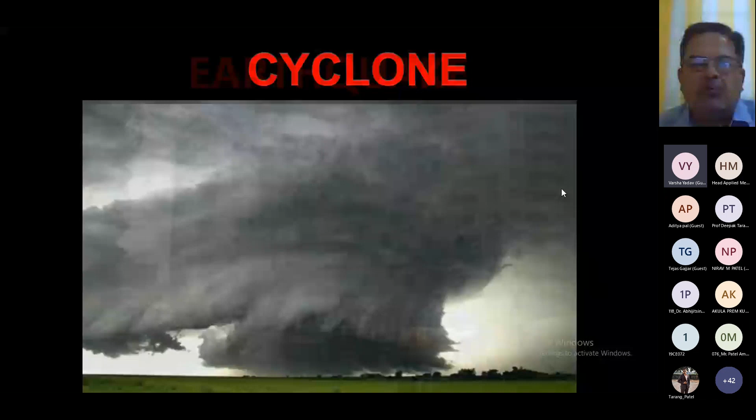Cyclone, we have flood, we talk about fire, landslide, we talk about liquefaction, we talk about tsunami and many other disasters, right? But these are the disasters which are important from the structural engineering point of view, so these disasters are included here.

And when we talk about these disasters, either we categorize them into natural disaster or man-made disaster. Most of the time, we say earthquake disaster is a natural disaster, cyclone we say it's a natural disaster. Flood, when it comes to flood, we say it is both ways, it is a natural disaster as well as a man-made disaster, because sometimes because of the mistake of human beings, the area is flooded.

For example, what happened in Surat was the classical case of man-made flood. Same way, Machu Dam collapsed way back in 1979, and that was because of human error, so you can say it's a man-made disaster. So flood may be man-made, it may be natural.

Same way, fire is also natural and man-made. Landslide again is natural and man-made. For example, if landslide triggers because of earthquake, that is natural, but once you carry out mining operations in a hilly region, and if landslide triggers because of the explosion you are doing in the hilly region, then it is a man-made landslide. Same way, you have liquefaction and tsunami.

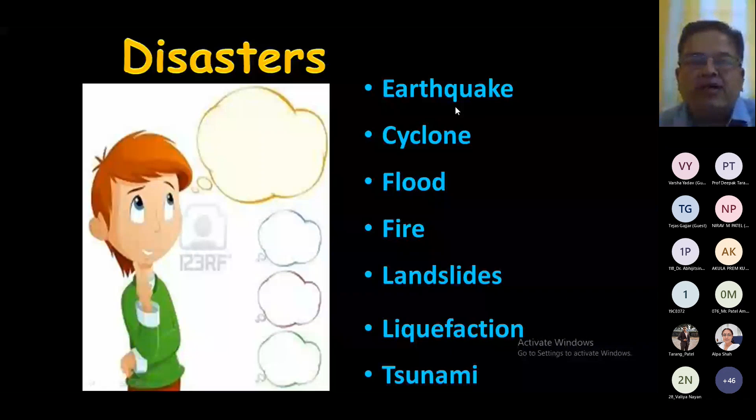Therefore, earthquake is a man-made disaster, and the solution lies in the building, not in the earthquake. You have to make your building safe. You have to consider all types of earthquakes when you design your buildings, but your building should remain safe during the earthquake. That is the most important challenge we have. So you have to focus on building safety, and construct buildings in such a way that they remain safe during earthquake or any disaster. So again, earthquake does not kill, unsafe buildings do, and therefore earthquake is considered a man-made disaster.

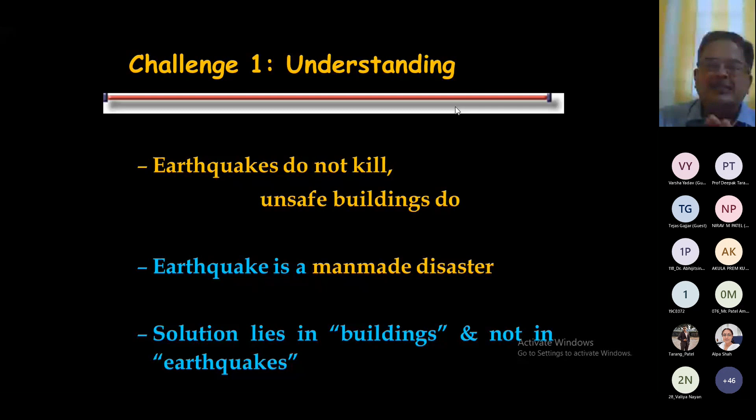Earthquake is a natural hazard, but the disaster is man-made. If you look at any particular disaster, you find two things involved: loss of life, which is fatalities. If 100 people die during disasters, 47 of them die in earthquakes, so the highest contribution is from earthquake. Similarly, if we lose 100 rupees in economic loss, 35 rupees of that is the contribution of earthquake. So the highest economic loss is also associated with earthquake.

So you have to be very cautious when dealing with earthquakes and structures. Design of buildings for earthquake is a very challenging job.

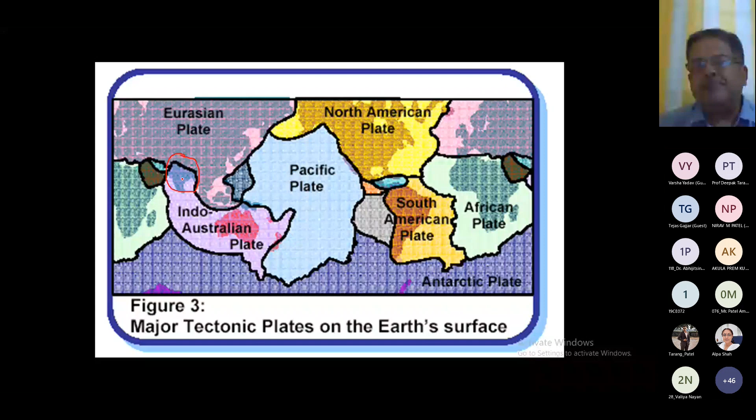So we go to the scenario of Indian earthquakes. We know there are 7 major tectonic plates: Eurasian, Indo-Australian, Pacific, North American, South American, African, and Antarctic plate. India is located on the boundary of two plates, the Eurasian plate and the Indo-Australian plate, and the Indo-Australian plate is going below the Eurasian plate.

We know that on the northern boundary, right now we observe the Himalaya there, but 10 crore years back there was a sea, and this sea was disappearing.

This Indo-Australian plate is moving below the Eurasian plate, so they are creating pressure on each other. When the stresses within the plate exceed the limit, the plate will break, and therefore the majority of earthquakes occur on this boundary of the two plates. If an earthquake takes place on the boundary, it is known as an interplate earthquake, and the earthquake which takes place within the plate is known as an intraplate earthquake.

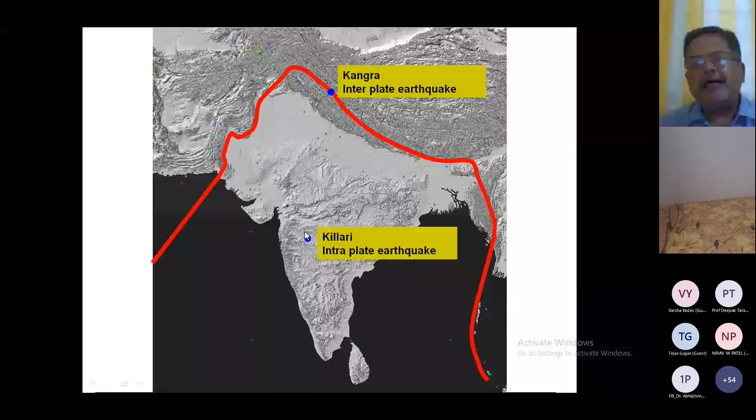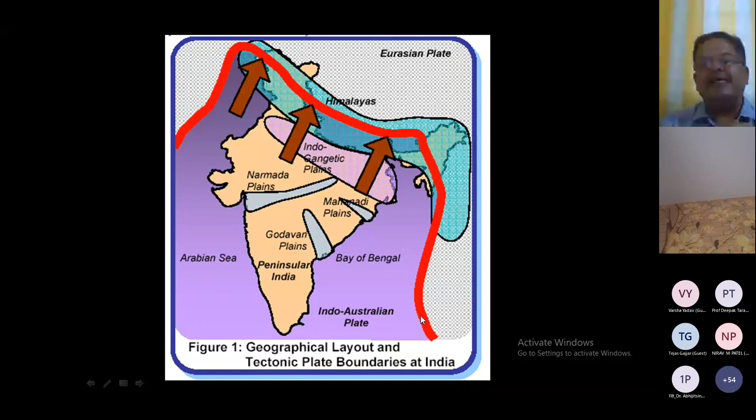Now if you look at this, we have seen this picture. This is the boundary of the Indo-Australian plate and the Eurasian plate, where these two plates are interacting. The Indo-Australian plate is going below the Eurasian plate, and you can see that more than 95%, actually 98%, of earthquakes are coming on this boundary where these two plates are interacting.

So when we are locating earthquakes, or the epicenter of earthquakes, on a map, it is known as an epicentral map. This map will tell you that most of the earthquakes are coming on the boundary of the two plates, and within the plate few earthquakes are there. So almost 98% of earthquakes are on the boundary, and maybe 2% of earthquakes are within the boundary of the two plates.

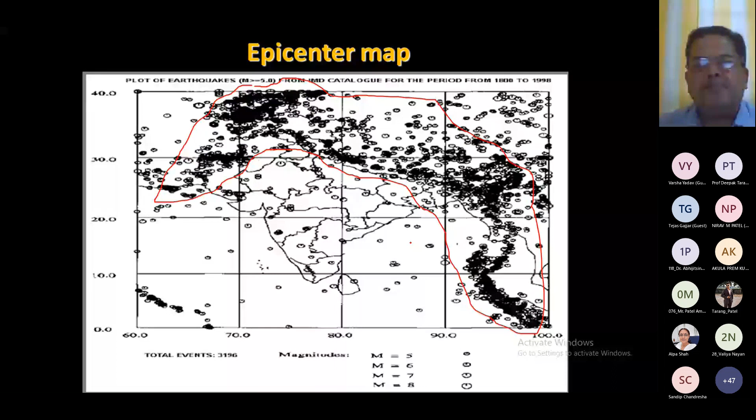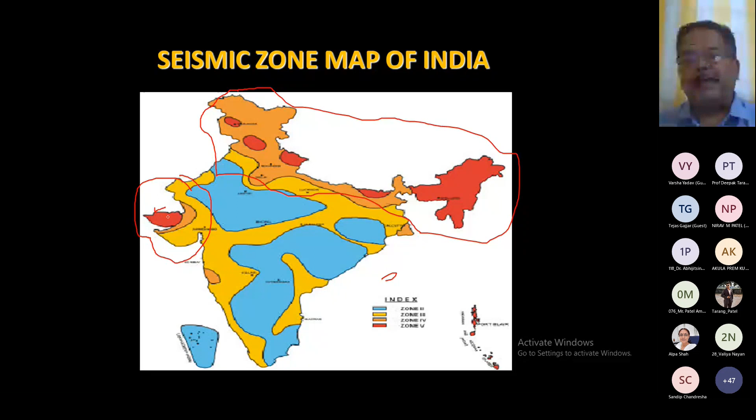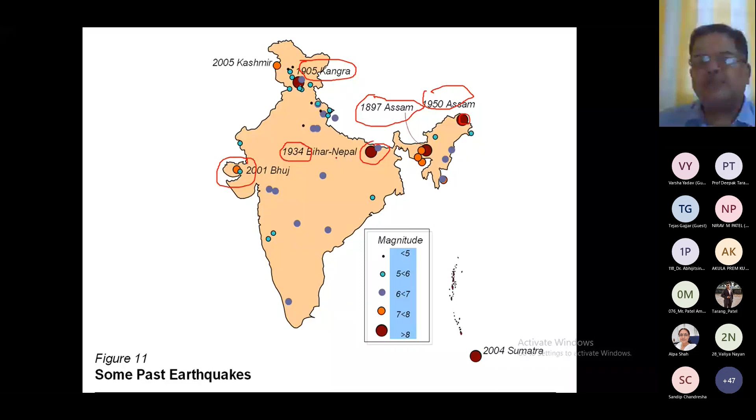And you see, this is the epicenter where the Bhuj earthquake took place. This is the place where the Bhuj earthquake took place.

Now, if you look at some past Indian earthquakes, and if you look at this particular list, you find that the Kutch earthquake of 1819 had a magnitude of 8.3, and the number of deaths observed was 1500. In 1819 it was thinly populated, and even though 1500 deaths had been observed - if you look at the Assam earthquake of 1897, it is 8.7 and 1500 deaths again observed.

If you look at the Coimbatore earthquake, magnitude 6, but the most important thing is this number - no death had been observed during the Coimbatore earthquake. Now, Coimbatore is in the south. It is an intraplate earthquake, and the magnitude was less, and the time of shaking was also very less.

The Kangra earthquake of 1905, magnitude 8.6, 19,000 deaths had been observed. Just imagine, in 1905, Kangra is in Himachal Pradesh, and if such a big number of casualties happened during that time, it exhibits the severity of that particular earthquake.

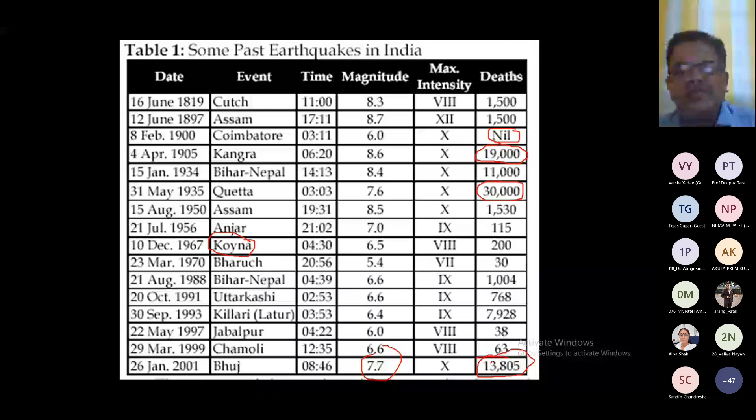Numbers of deaths should be nil. Again, I'm saying we always assume that our structures are safe. We design our structures in such a way that they should remain safe during all disasters, and therefore this number should appear nil as far as the column of death is concerned. But you can see 14,000 deaths within a few seconds, which is something amazing.

So if we talk about some great Indian earthquakes, I told you that India has a probability of having big earthquakes whose magnitude is 8.3, meaning more than 8. It is considered to be a great earthquake. So India has observed 5 great earthquakes in the past: 1819 Kutch earthquake, 1897 Assam, 1905 Kangra, 1934 Bihar-Nepal, and 1950 Assam.

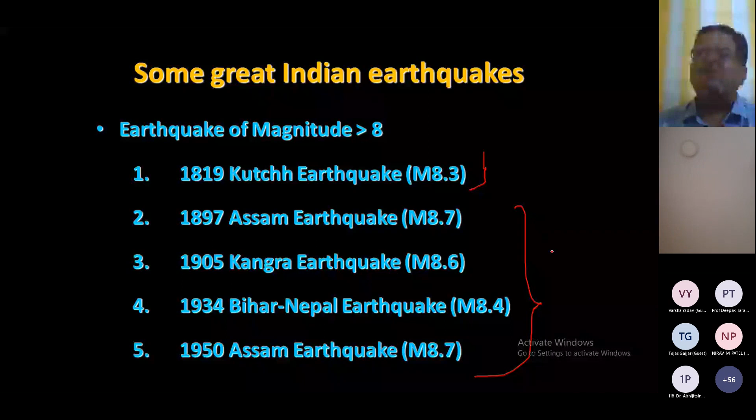Out of these, if you look at this, these 4 earthquakes are interplate earthquakes, and this one is only an intraplate earthquake. I'm talking about earthquakes which took place on the north or northeast boundary. So if I'm talking about the interplate earthquakes, you will find 4 earthquakes.

From 1897 to 1950, how many years is that? 53 years. India has observed 4 great earthquakes. What is the return period? The return period is 13 years. So we can conclude that India has a probability of having big earthquakes at an interval of 13 years. The whole earthquake engineering is based on probability.

You can see in the last 72 years, from 1950 to 2022, no great earthquake took place on the boundary of these 2 plates. But if India has a probability of having big earthquakes at a regular interval of 13 years in the past, as we observe, then I can say that after 13 years we have a probability of a big earthquake. If it doesn't come, then after 20 years the probability will increase.

Now you can see 72 years have already gone past, and we don't have a great earthquake on the boundary of these 2 plates. And therefore there is a theory of seismic gaps. If you look at the theory of seismic gap...

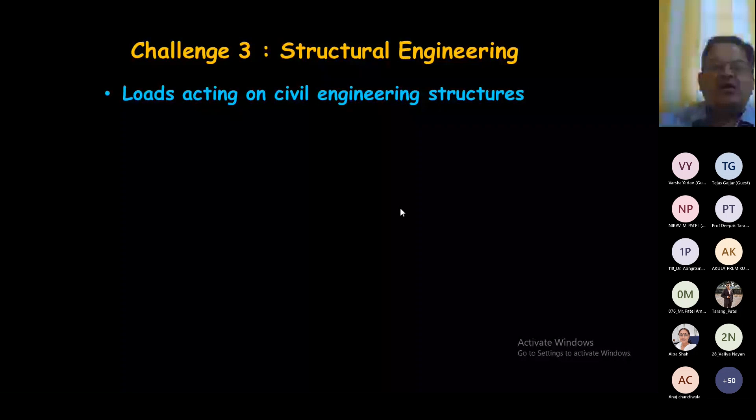When we talk about our structures, we are generally designing them for the loads acting on them. There are two types of loads: gravity loads, which act in the direction of gravity - dead load and live load - and some loads which act in the lateral direction. There are many types of loads acting on a structure, but I'm talking about the basic loads of concern for which we design our structures, the dead load and live load, which are known as gravity loads.

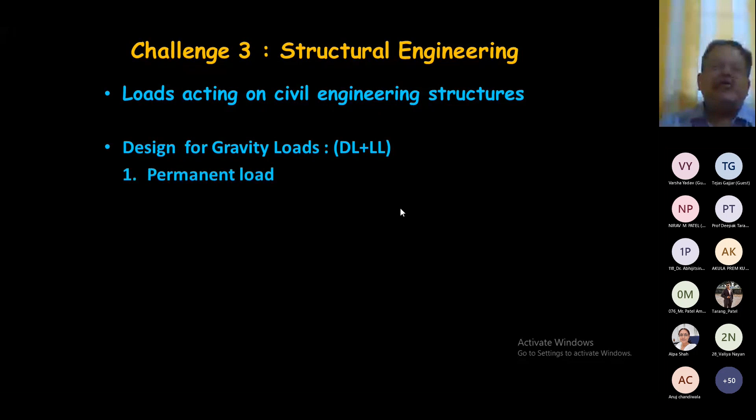Generally this load is acting on your structure, so we consider it a permanent load. And we know that if I'm designing my column for 100 kilonewton, then I apply a factor of safety of 1.5 load factor, and design that column for 150 kilonewton. So actual load coming on that column is 100, but we are designing for 150.

It means your structural element is not going to get damaged under any circumstances. So they are designed for a no-damage condition. This is very important. When you're designing your structure for gravity loads, it is designed for no-damage condition. So this philosophy of designing elements for gravity loads does not allow any sort of damage because the factor of safety is involved.

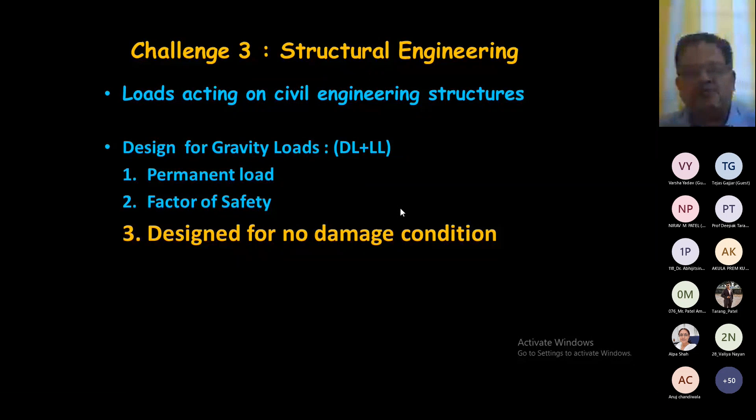When I'm talking about lateral loads, definitely wind and earthquake come to mind. Wind is quite frequent, and when we design our building for wind force, we apply a factor of safety, and we are not allowing damage during the wind force. During the cyclone, we are not expecting damage because we are designing our structure with a factor of safety. But when it comes to earthquake, how we design is important.

Now, if you look at the earthquake event, the philosophy for earthquake design is something different as compared to the design philosophy for gravity load. So we have to understand earthquake first. Actually, what happens in an earthquake? The rock fractures, and because of the sudden fracture of the rock, energy is released, and this energy travels in the form of waves which shake the foundation of the building.

So some of this energy enters into the building, and your building has to absorb this energy. If your building is able to absorb this energy, it remains safe. And if your building is not able to absorb the energy, it will collapse.

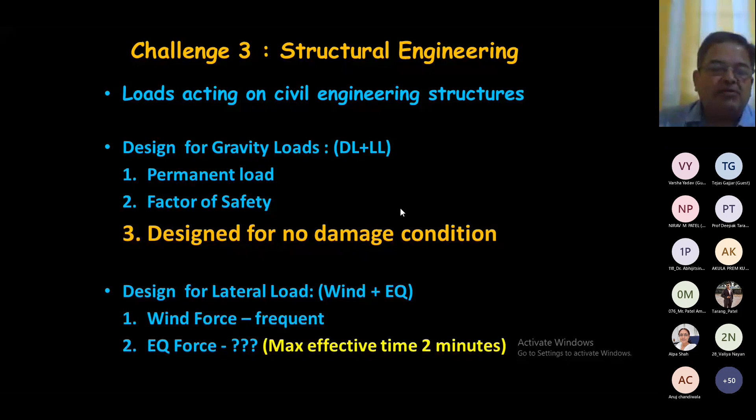So when I'm talking about earthquake, I'm not sure whether my building will absorb the earthquake or not. We'll see that part. That's why I had taken this example: compare two structures constructed in the Kutch region of Gujarat.

Generally, buildings are designed for 50 years. Right now in Gujarat, construction of tall structures is allowed, and as per the code, most tall structures whose height is more than 100 meters are designed only for 50 years. Here I am considering 100 years - double what is mentioned in the code. I'm considering the life of the structure to be 100 years.

Now I'm considering the first structure, which was constructed in 1818. If I consider the life of the structure is 100 years, it means for these 100 years your structure should remain functional, and the stresses must be within limit. Then you can say that your structure is fulfilling the requirement - it should remain functional and the stresses must remain within limit. That is the requirement for a structure to be usable.

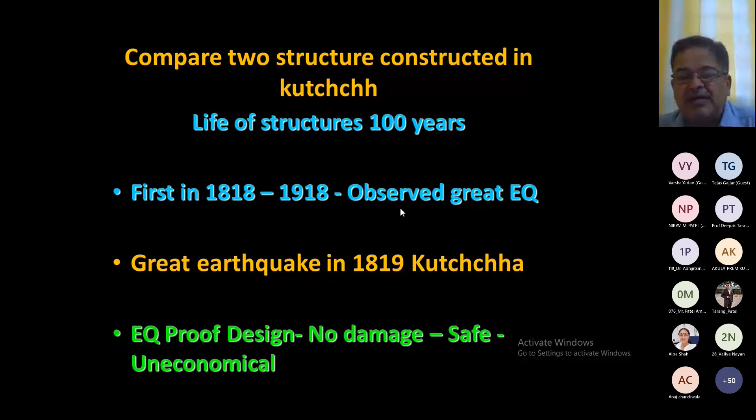It is uneconomical, right? Now I'm considering the second structure, which is constructed in 1820. Second building, 1820. Now this building will expire in 1920. So if you look at the history of earthquakes in Kutch region, we had a great earthquake in 1819, and then a major earthquake in 1956 in Anjar. Now if I'm talking about this building from 1820 to 1920, this building has not observed any earthquake.

Now this is the other part. One building has seen an earthquake after its construction. The other building has not seen any earthquake during its life. So therefore we are saying the earthquake is not a sure event. Whether your building will see an earthquake during its life or not, it is not sure. And if we learn something from this second building, constructed in 1820, then this building is saying that there is no need to design for earthquake.

Now you see, I told you that whole earthquake engineering is based on probability. And suppose the earthquake came not in 1819 but in 1850, then it might have observed collapse. So the building becomes unsafe. And for unsafe buildings, there is no space in the field of construction. So we cannot design unsafe buildings.

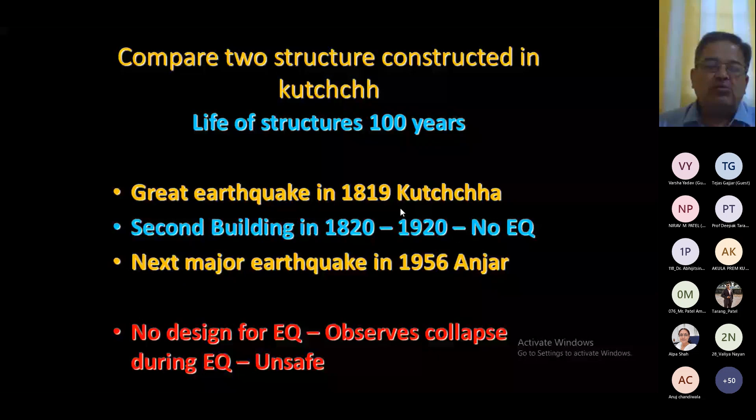So the first building is saying that you design the building as earthquake proof, and this building is saying that there is no need to design the building. So two extremities. And therefore what we can conclude is that the earthquake event is not a sure event, and therefore we are going for another approach, which is known as earthquake resistant design. Now what is earthquake resistant design? That I'll tell you.

Now in this earthquake resistant design, we are allowing the damage, but we are not allowing collapse. So when I'm allowing damage in my structure, but not allowing any sort of collapse, then it is safe, because your building is not going to collapse during the earthquake. And at the same time, it is also economical, because I am designing my building for a lower level of force. So instead of going for earthquake proof design or no design concept, we are going for earthquake resistant design concept, and this is the only philosophy in which damage is expected.

Now I will make you understand what exactly we are doing in earthquake proof design. So here, look, this is point D. This is the maximum force coming on your structure. And when I'm designing my structure for this maximum force, this is the force versus deformation curve.

Now it remains linear. Linear means it remains elastic. So when I'm designing for the maximum force, and during this my structure remains elastic, then it is not going to observe any damage, because the structure will deform and then come back to its original position without any damage. So your building is safe. But you are designing, for example, this load is 100 kilonewton. When you are designing for 100 kilonewton, your structural element will become too costly, it will become uneconomical. So it is safe, but it is uneconomical.

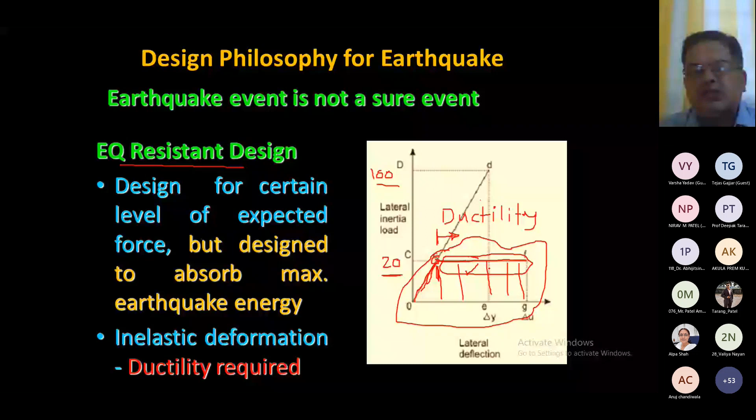So here we are allowing this inelastic deformation. This earthquake resistant design, we are allowing the damage. The damage is allowed in this particular portion, but no collapse, remember, no collapse. So it is safe, because no collapse is observed, and it is economical because instead of designing for 100, you are designing for 20. So your structural elements are very small compared to 100.

But the only risk in earthquake resistant design is if an earthquake comes, then you have to be ready for retrofitting. In case of a major earthquake, your building will absorb damage, and there is a possibility that retrofitting is needed after the earthquake.

So therefore, I'm always saying that earthquake design is not a strength-based design. We are not designing for 100% strength, we are designing for 20% strength. But the earthquake resistant design is basically based on the energy absorption concept. How much energy is absorbed by your structure?

Because earthquake releases energy, and your structure has to absorb that energy. Here we are allowing the damage. We are making our structure ductile, and when we make our structure ductile, it will absorb a lot of energy. So earthquake resistant design is always a challenge. Why? Because actual load coming on your structure is 100 kN, but you are designing for 20, and after designing for 20, you are still saying that my structure is safe.

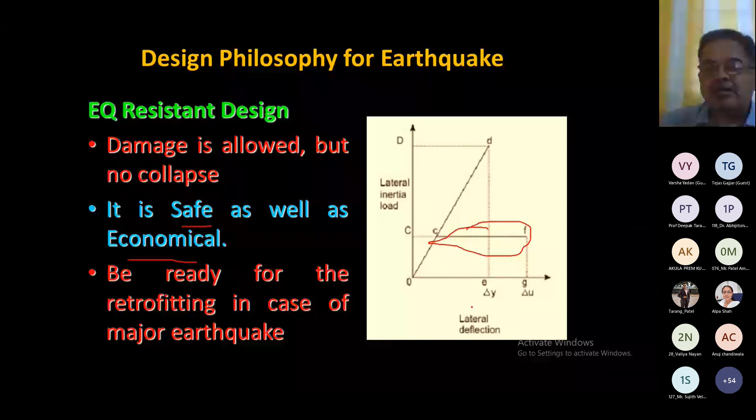So earthquake resistant design is a challenge, and as engineers, we have to contribute to make our structure safe. There are various challenges ahead which we'll discuss. Now this is very important, remember this curve.

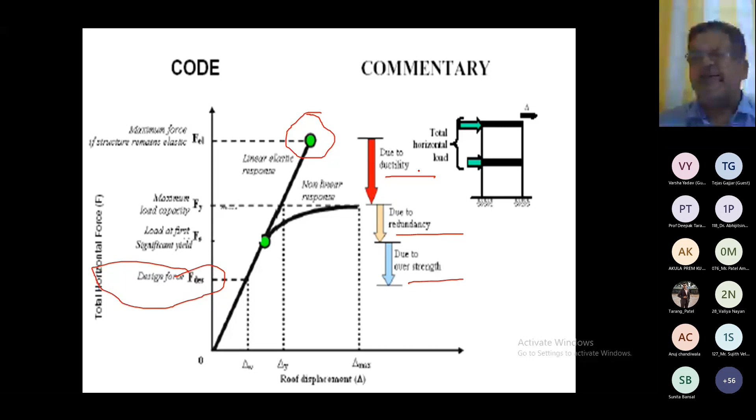This is the maximum load coming on your structure because of the earthquake, and you are designing only for this much force. So here, this is the design force, and you see how you are reducing this maximum load to the design load. This is because of ductility, redundancy and overstrength. These are the three factors on which we depend, and we reduce the load from maximum load to design load.

So we design in such a way that your structure should behave in a ductile way, and it will absorb a lot of energy. During earthquake you have to design your structure so it absorbs maximum energy, because during earthquake energy is released, and this energy enters into our building, and our building has to absorb the energy to make our structure safe. So up to a certain point your behavior is elastic, and then onwards you have inelastic behavior, that is where ductility comes into picture.

So the philosophy of earthquake resistant design - I'm not going in depth as far as this philosophy is concerned, but damage is allowed. This is the only philosophy in which damage is allowed, but collapse is not allowed. When a major earthquake comes, our structural element will absorb the damage, and after the earthquake, we have to retrofit our structural elements and make our structure functional again.

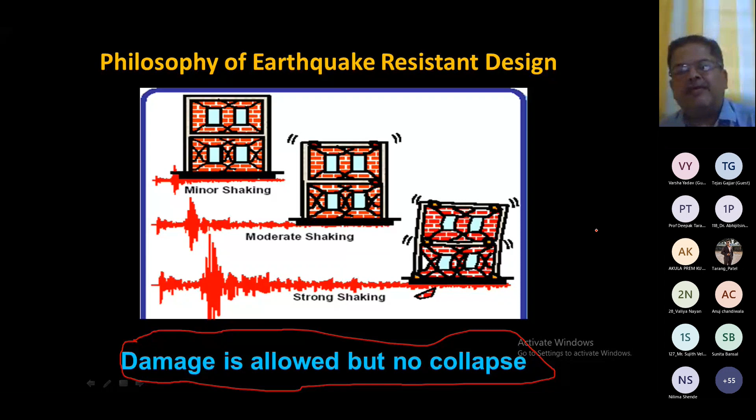Now let's compare this to earthquake proof design. Earthquake proof design means we design our structure for the maximum expected force, and your structure should remain elastic throughout the earthquake, and if it remains elastic, then there is no damage. So it is safe, but uneconomical, and ductility is not required. But you are designing for very high level of force, making your structure uneconomical, and we are not even sure whether the building is going to see that earthquake or not.

In earthquake resistant design, we design for a certain level of expected force, and we rely on inelastic deformation where damage is allowed. So when you design for 20% force, your structural element will be very small compared to the 100 kilonewton force. So it is economical, and also safe because we are not allowing any collapse. But the most important thing is ductility is required - remember, ductility is required, and IS 13920 is very important for earthquake resistant design. The only important thing is, if an earthquake comes, you have to be ready for retrofitting in case of a major earthquake.

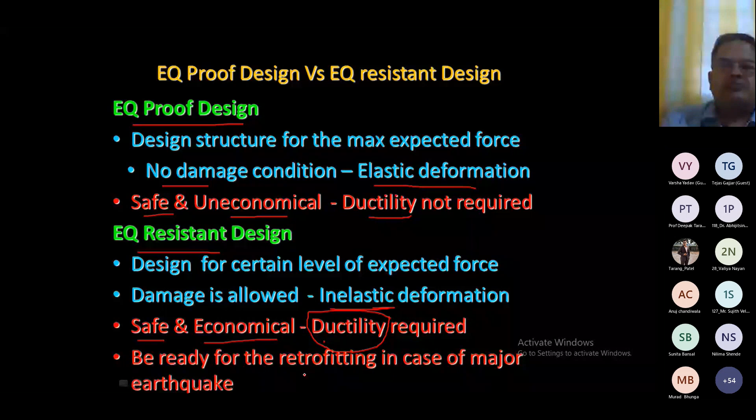Now our philosophy is saying that collapse is not allowed, right? But what is the reality? What is the fact? The fact is structures are still collapsing during earthquakes, right?

If you look at the 1994 Northridge earthquake, 1995 Kobe, or 1999 Turkey earthquake, or 2001 Bhuj earthquake, we have seen devastation during these earthquakes.

Japan is considered to be the best as far as earthquake preparedness is concerned, and even though in the 1995 Kobe earthquake, numbers of bridges failed in Japan, right? And it exposes the wrong practice of earthquake resistant design. So even though Japan is very proactive, because Japan is sitting on the ring of fire and has observed earthquakes at regular intervals, even though this is happening with Japan, then this is really alarming.

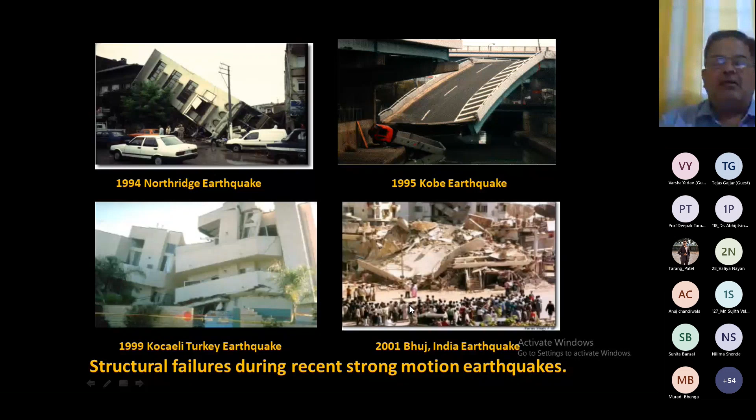If you look at America also, numbers of buildings collapsed, not like India or Turkey, but in America fewer buildings collapsed as compared to developing countries like Turkey and India. But structural failure had been observed during strong motion, right? And what is happening? I told you, the loss of life.

Now, this kind of picture we always observe during the earthquake. If you see such kind of pictures, then these pictures will disturb you as a civil engineer. You are, or we are, not ready to accept this, right? It always questions us, who is responsible for this, right?

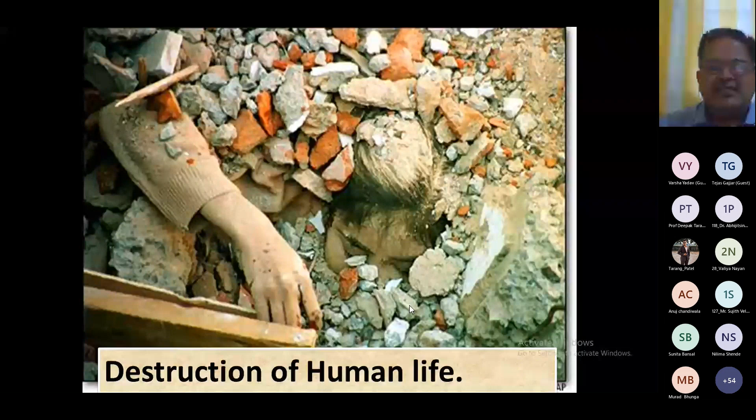This is the picture from the 2001 Bhuj earthquake. I want to share my experience of the 2001 Bhuj earthquake. I was working as an NCC officer, and we worked with the Indian Armed Forces. The Indian Armed Forces was given the responsibility of rescue and relief operation after the 2001 Bhuj earthquake.

So what they have done, they have cordoned off each and every collapse site, and they are bringing the dead bodies and valuables out of that debris, right? Our NCC cadets were working with them, and we worked for almost 6 months, and we learned a lot. Our NCC cadets have brought dead bodies out of the collapse site.

I was also involved in bringing a dead body of a 4-year-old boy, right? Now, when we are bringing it out, it always questions in your mind as a civil engineer, who is responsible for this?

I want to say that after bringing that dead body of the 4-year-old boy, I was not able to sleep for a month, I tell you. And it always questions us, who is responsible for this? As a civil engineer, we are not expecting this. If such a thing is happening, it means someone has committed a mistake. And who has committed the mistake, it is very difficult to find out.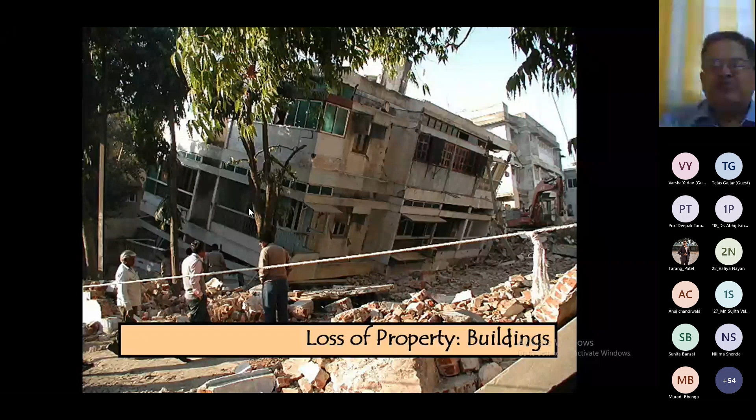Because of this, the Anjar, Bhachau, Rapar villages or towns came to debris during the 2001 Bhuj earthquake. If you look at this, the building collapsed. This is a typical soft story failure. So this is actually loss of property, and maybe loss of life is also involved in such kind of collapse.

Now just imagine, in Bhuj the earthquake took place, and this hospital building collapsed, and people were taking treatment in open spaces. Now it was winter, right? This shouldn't happen. If you look at the schools, 12,000 schools were either damaged or collapsed.

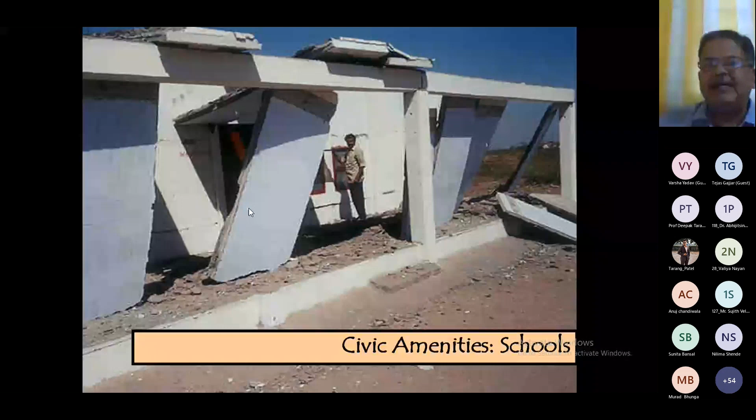The heritage buildings, they suffered a lot, and we know we are not able to restore this heritage building, because we don't have the skilled manpower. So once heritage is lost, it is lost forever because of unavailability of skilled manpower.

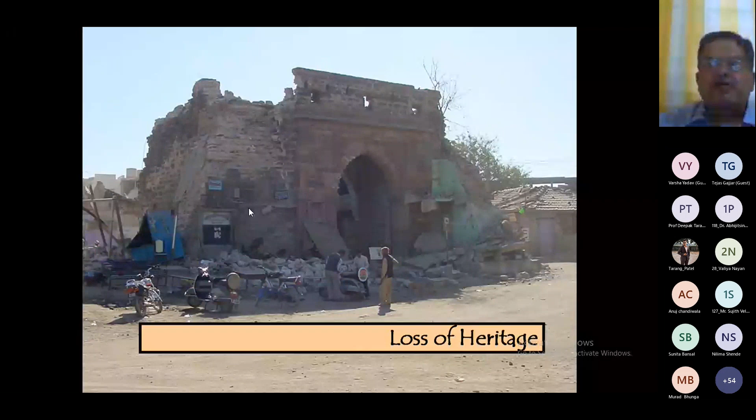This you can see is Mani Mandir in Morbi. It was damaged, and after 12 years it was partially retrofitted, and people started using it again, but not 100% - a portion is underutilized. This is the fort of Bhuj, damaged, and again, it's difficult.

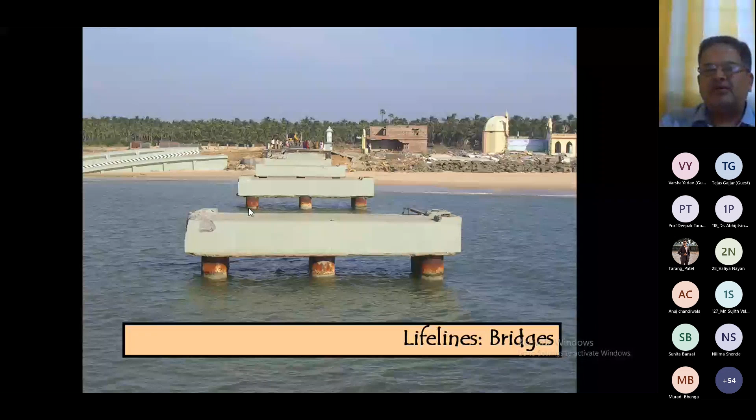Lifeline structures are affected a lot. The bridges are affected a lot, the roads network affected. So under these circumstances, we are not going to be able to carry out rescue and relief operations properly - it is affected a lot.

The electric power is affected. Harbor structures absorbed great damage during the 2001 Bhuj earthquake, and the industrial structures constructed with RC elements absorbed damage. The industrial structures constructed with steel, they are not affected because they are lightweight structures, but the RCC structures were affected a lot because they have a larger span and are very massive.

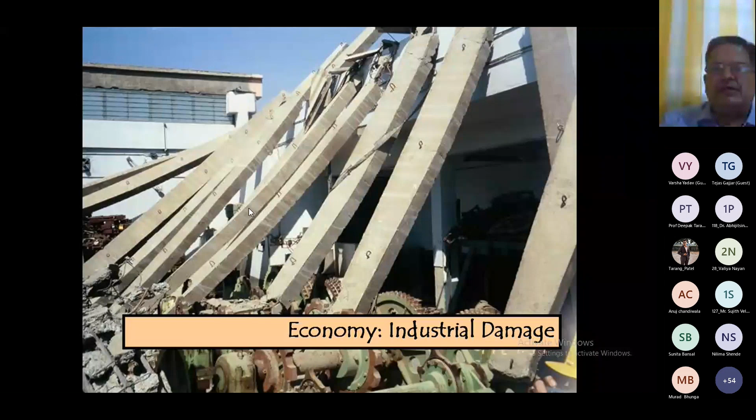And the economic loss is very difficult to estimate, right? So if you look at the 2001 Bhuj earthquake, we lost almost 25,000 crore. Now if you consider it today, it is maybe more than 4 lakh crores or 5 lakh crores. So the economic loss is very difficult to estimate.

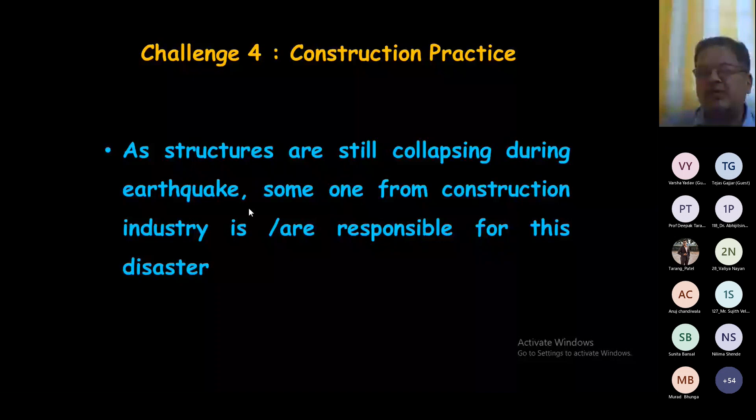So challenge number 4 is construction practice. As structures are still collapsing during earthquakes, someone from the construction industry is responsible for this disaster. Who are the stakeholders of the construction industry? We know the builder and owner, who is conceiving the project - he must be honest. If he's not honest, then definitely we are adding unsafe structures.

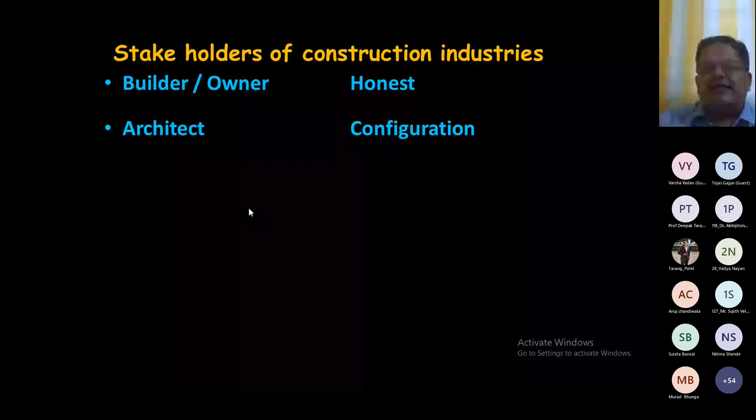Architect has to give good configuration. Structural engineer has to impart structural safety. Site engineer has to look at the quality of construction. The mason and carpenter have to look at the quality of construction. The authority has to enforce the law. And if we enforce the law properly, all the stakeholders of the construction industry will follow that, and definitely we will have much better structures in society.

And the teachers and students, they are part of capacity building. Right now this training is organized, and basically we are building capacity in the area of earthquake engineering. So these are the various stakeholders, and the attributes we want from each are marked against them.

Challenge number 5 is error in safe construction. Generally we commit 3 types of mistakes during construction: error of intention, error of concept, and error of execution. Now what does error of intention mean? It means I know what is the wrong practice, and I don't want to go for the correct practice - I'm following the wrong practice even though I know the correct practice.

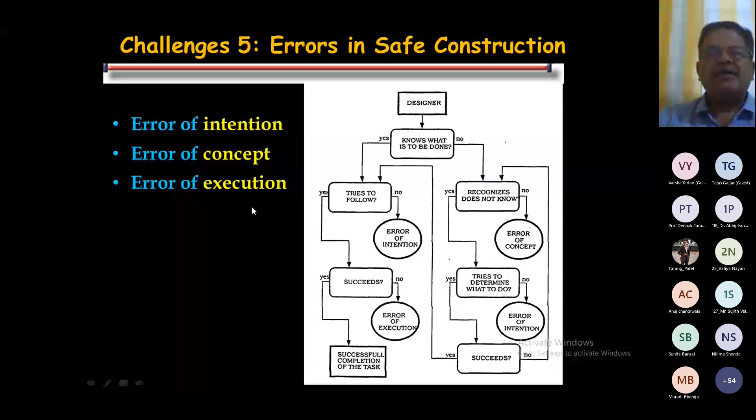Now the next challenge is a change in attitude. What is the change in attitude? It's a mode of denial. Let's take the case of the 2001 Bhuj earthquake. This earthquake had magnitude 7.7. 13,805 people died, as per the official record of the government.

Ahmedabad is located almost 250 kilometers away from the epicenter. 130 multi-story buildings collapsed, mostly ground plus 4-story, and two buildings were ground plus 10-story, Mansi and Sikhar. Almost 805 people were killed in 70 buildings. Out of the 130 buildings collapsed, in 70 buildings 805 people died.

If you look at these buildings, you find they were very new, life less than 10 years, almost 10 years. They were designed by architects and engineers, built by developers. If you look at the buildings of old Ahmedabad, like the old construction in the pols, we have not seen collapses of those old buildings.

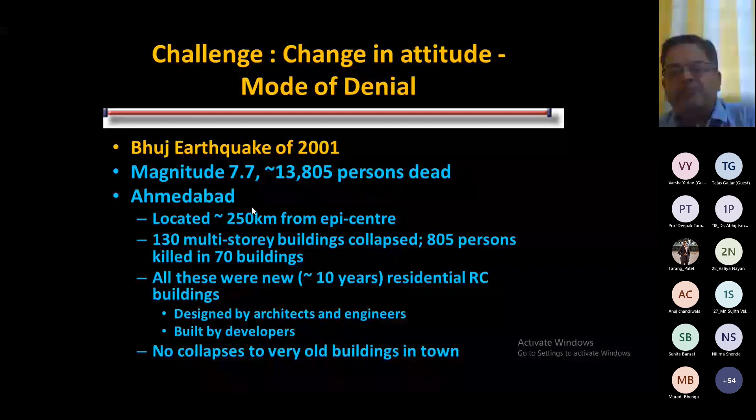Now, what was the argument of the structural engineer and builder? They are saying that this earthquake was very unusual. The intensity felt at Ahmedabad was above, or more than, what was expected in Ahmedabad.

But fortunately, we have a broadband seismometer in the passport office in Ahmedabad, and we have a record of the earthquake from that seismometer. Ahmedabad is in zone 3, and as per the Indian code, the intensity expected is 7. Intensity 7 we are expecting, and the maximum intensity observed during the Bhuj earthquake was 7. So it was not an unusual strong shaking.

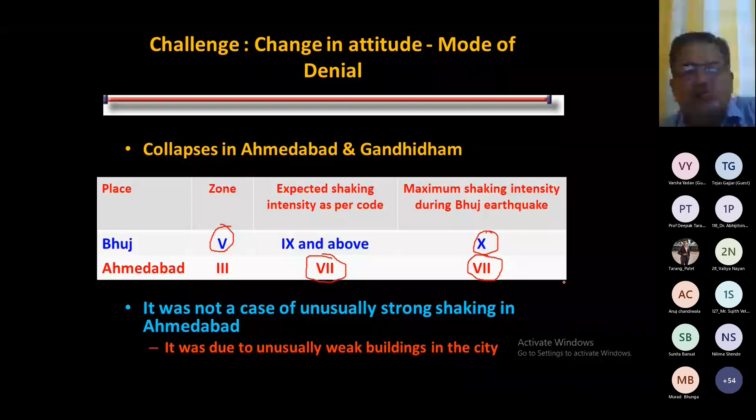If you look at Bhuj, it is in zone 5, so we are expecting intensity more than 9, and the intensity in Bhuj was 10. So again it is within the limit as per the code. So we are in a mode of denial.

But what are the reasons why this happened in Ahmedabad? It is because of total disregard to the structural system. The structural systems were not proper. Even if you talk about the lift, generally the lift well is constructed with RCC, but in many of these buildings we have seen the lift well constructed with masonry. I think this is a very poor practice.

The structural system is very irregular. We have a soft story, we have parking at the ground story, and then we start living on the upper stories. So what happens is the ground floor becomes very soft, and almost 90% of buildings in Ahmedabad which collapsed, it was because of the soft story.

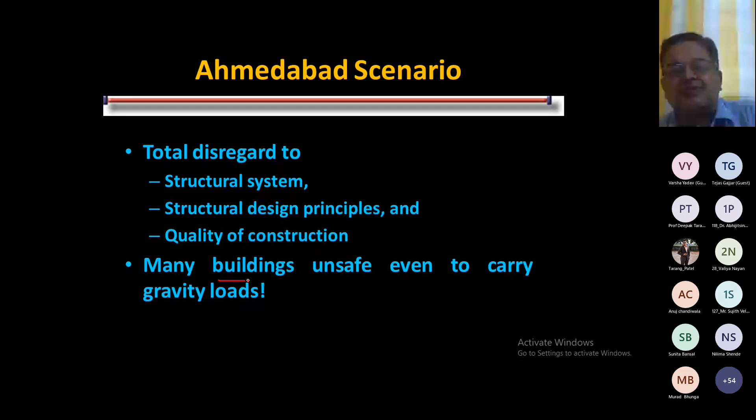We have not followed the structural design principles, and the quality of construction was very poor. There was a building in Junagadh, a 10-story building, which collapsed not during the earthquake but normally, under the gravity load. So you see, this type of poor quality of construction leads to big disasters.

Now the question is about developed country and developing country.

If I told you that in the 2001 Bhuj earthquake, 13,805 people died. A similar earthquake took place in California, and how many deaths were observed? There were 50 deaths in California. America is a developed country with very strict and stringent bylaws for earthquake safety, and enforcement by the authority is really wonderful in America, but still buildings are collapsing there.

If you look at India, in Latur 1993, almost 8,000 deaths were observed. In Kashmir 2005, 95,000 deaths were observed. If you talk about Iran, Turkey, or Pakistan, you see, if an earthquake takes place, thousands of people will die.

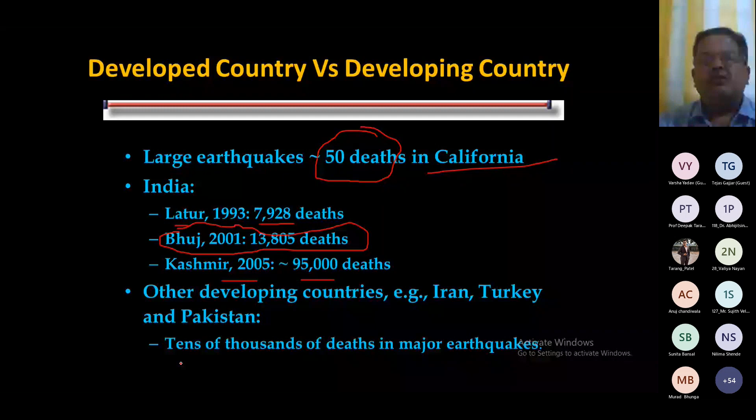If you look at the economic loss, I told you 25,000 crore, 5 billion US dollars, that was the loss in Bhuj. If a similar earthquake took place in the north or northeast boundary, it would be more expensive.

Now, another challenge is we are not learning from past earthquakes. We are not learning from past earthquakes. I'm just discussing a few examples of it.

If you look at the Bihar-Nepal earthquake of 1934, magnitude was 8.4, intensity was 10 on the modified Mercalli scale, and almost more than 10,000, around 11,000 deaths were observed.

Now the question will arise: did no such big earthquake take place in this particular region before? The answer is no, there was a big earthquake in 1833 also, and we haven't learned from this. After almost 100 years, another big earthquake hit Bihar and Nepal, and we have seen such a casualty. So we are not learning from past earthquakes. That is the problem.

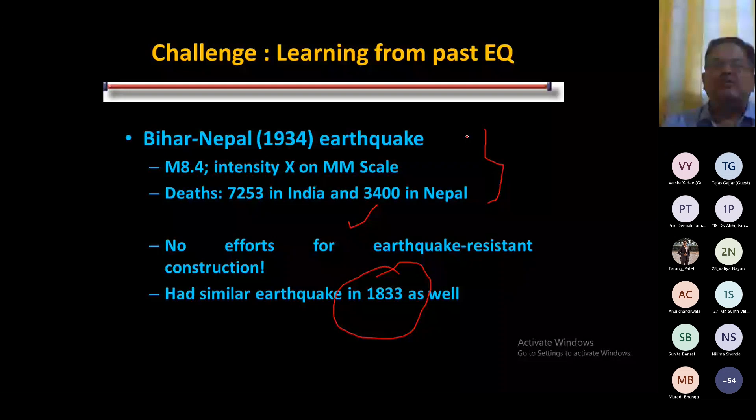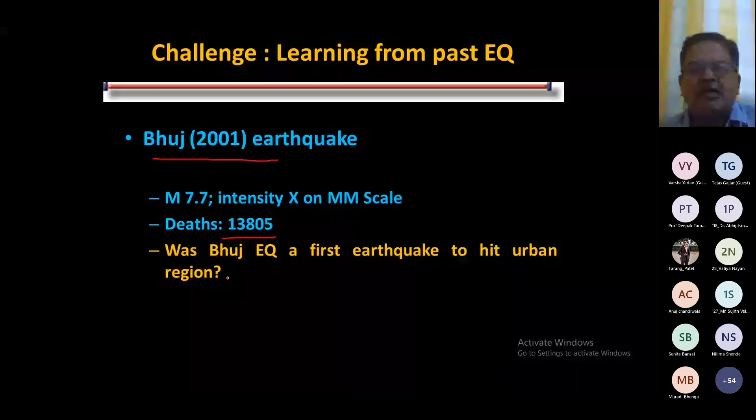Then if you look at the second example I'm giving you: the Bhuj earthquake 2001, 7.7 magnitude, intensity 10 on Mercalli scale, observed deaths 13,805. Now the question is, was Bhuj the first earthquake to hit an urban region? The answer is no, we had an earthquake in 1997 in Jabalpur, a city like Ahmedabad, and the urban area was affected.

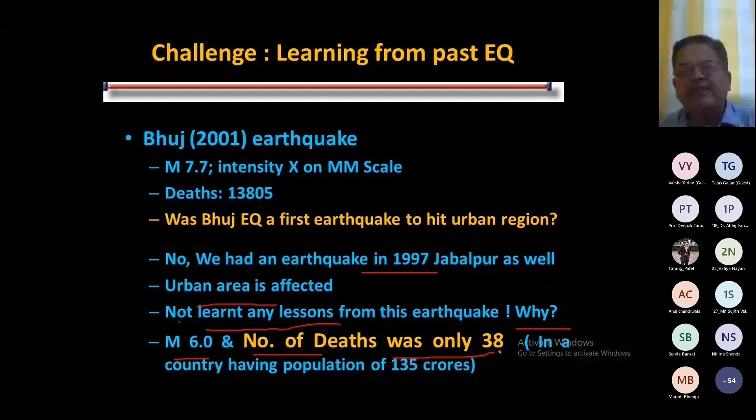Urban area was affected, but we haven't learned. We have seen similar types of failures in the Jabalpur earthquake, but we have not learned from it. Why? The reason is the magnitude of that earthquake was 6, and the number of deaths was only 38. We have a country of 135 crore people, and out of that only 38 died by any means. So we are not taking it seriously. If we had learned something from the Jabalpur earthquake, we might have saved Ahmedabad, but we haven't learned from this earthquake.

Now we are talking very negatively, you feel that, right? But there are some positive stories, success stories from India. We have seen them, but it's a long time back: 1930 in Balochistan, 1897 Assam, and 19th century Srinagar in Kashmir. These are the three main examples from where we can learn something.

So we are talking about the early development of safe construction. This is the Dhajji Dewari construction, in Kashmir, Srinagar. It was developed after the damaging earthquakes in the 19th century. It's a masonry structure associated with wooden bamboo, which works as bracing, and the performance was excellent. This is not designed by an engineer, I tell you. This structure is designed by the people of Kashmir, people of Srinagar, and they learned from past earthquakes and from their own experience.

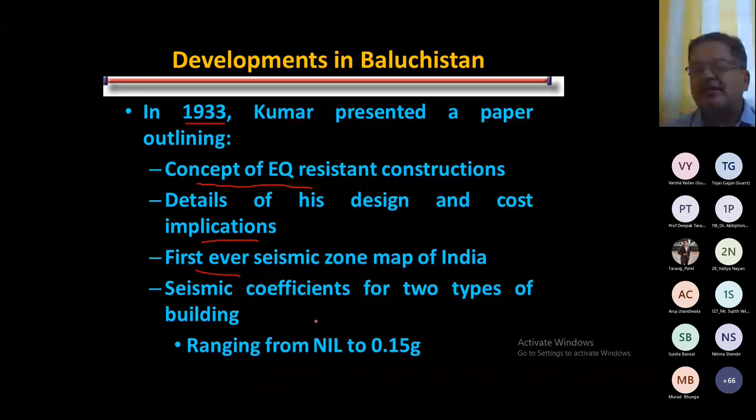In 1933, Kumar presented a paper and gave a concept of earthquake resistant construction, with details of his design and cost implications. He gave the first ever seismic zone map of India, and gave a seismic coefficient for 2 types of buildings. This is the seismic zone map given by SL Kumar.

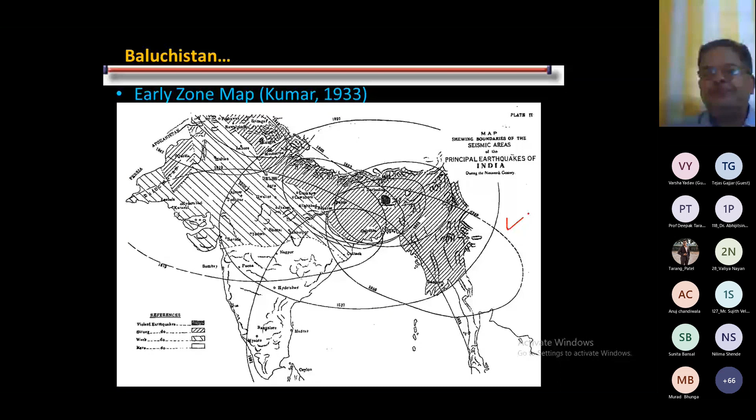So again, there was an earthquake in 1931. It was 7.4, and 100 people died. After that, SL Kumar was given the responsibility to construct the railway quarters.

And there was an earthquake in 1935, in Quetta. The magnitude was 7.6. Intensity observed was 10, maximum intensity. 30,000 people died, 40% of the population. Remember, 30,000 people died during the Quetta earthquake. But the quarters designed by SL Kumar performed excellently.

SL Kumar had not learned earthquake engineering. He designed everything by understanding the structural behavior. What he has done, this is remarkable.

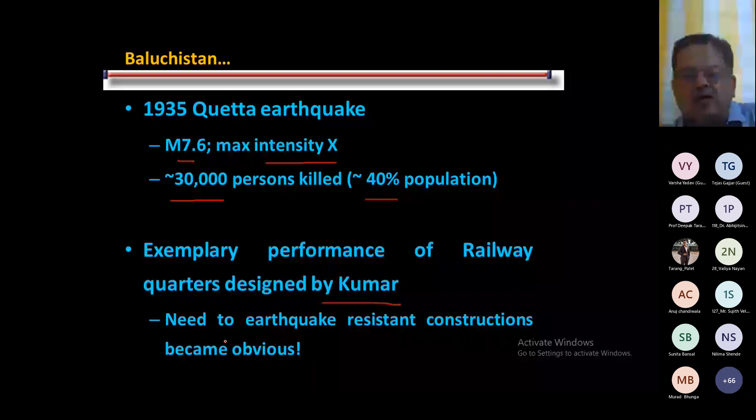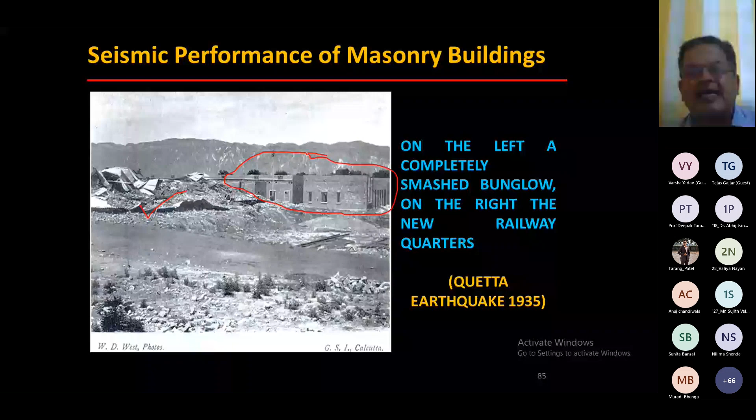Now, what he did, he introduced masonry in which he introduced reinforcement. He knew that masonry is a brittle material. The failure of masonry structure is very brittle, and when lateral force is acting, these masonry structures are very vulnerable. So to take the tension, he introduced the reinforcement, and he created a bond.

Like we have an English bond, we have Flemish bond, but he introduced a new type of bond in which he could introduce the reinforcement, known as the Quetta bond. SL Kumar had not learned any earthquake engineering, but he designed this building on his knowledge only, and these structures performed excellently well during the earthquake of 1935.

So it gives us the idea that if you do anything honestly and for the society, you can do wonders.

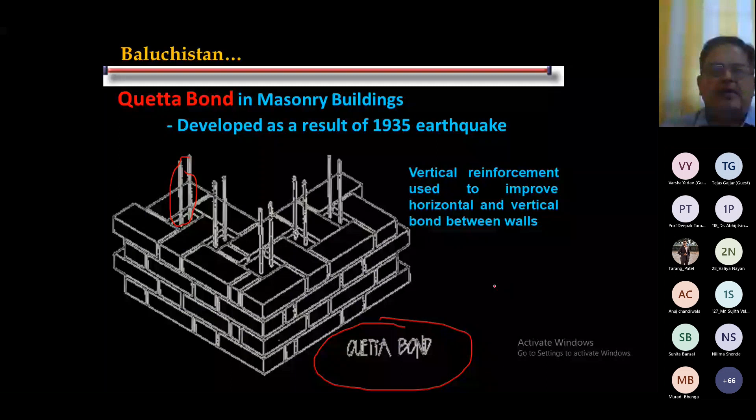We know that some fantastic work has been done from 1897 to 1935. New typology of buildings were introduced: the Quetta bond, Assam type of housing, the Dhajji Dewari.

But after 1935, there have been many earthquakes, but we have not done anything. If you look right now, we are more vulnerable than 50 years ago. Another important thing is that the developments in 1897 and 1935 were led by professionals, not by academicians. It should be that academics lead this, but instead professionals were leading at that particular moment.

So there is a new possible construction typology in India, which is confined masonry, for which we are conducting this course, and we will learn many things as far as confined masonry is concerned.

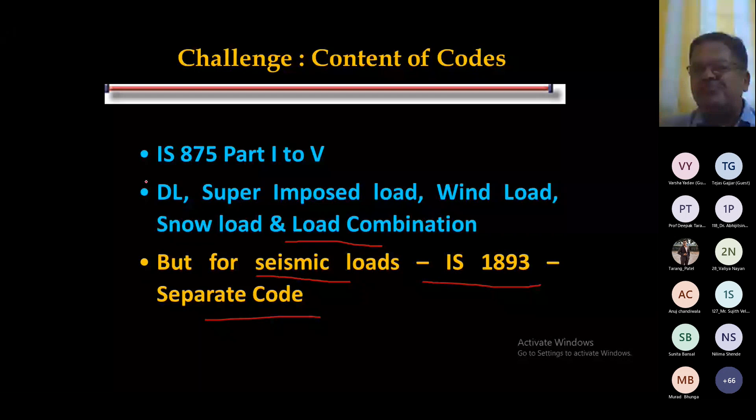Another important challenge is the content of the code. We have IS 875, which has 5 parts: dead load, superimposed load, wind load, snow load, and load combination. But as far as seismic load is concerned, we created a separate code, IS 1893. It must be included in IS 875 itself, because earthquake is a similar type of load that you have to consider.

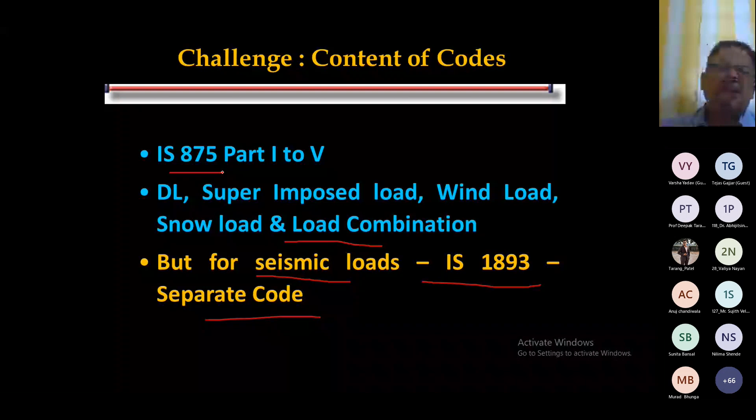People know IS 875, but people were not knowing IS 1893 before 2001 in Gujarat. We asked many people, they were not knowing even 1893. This is something unusual. So IS 1893 should be a part of IS 875. There should be 6 parts: dead load, superimposed, wind, earthquake, snow, and load combination. That is fine, but it must be included here only.

The second challenge was the regularity in development of the code. IS 1893, the code for earthquake resistant design, was developed in 1962, then revised in 66, then 70 after 4 years, then 5 years after 75. It was again revised in 1984 after 10 years, then 1984 to 2002 after 20 years, and now it is 2016, so after 14 years. This revision should be regular at an interval of 3, 4, 5 years.

Now look at how the biggest revision we made in 2002 came into picture. There was an earthquake in Latur in 1993, so the revision was started. Revision of IS 1893 was started, and this was revised in 2002, after the 2001 Bhuj earthquake. So you understand, we need one earthquake to start revision, and another earthquake to complete the revision. This should not happen.

The code must be revised at an interval of 4 or 5 years. We have to include the latest practice in the code, we don't want landscape changes in the code. That is required, so we are not doing it at a regular interval, and very few people are contributing as far as development of this code is concerned. Many professionals, many academicians should contribute in the development of the code.

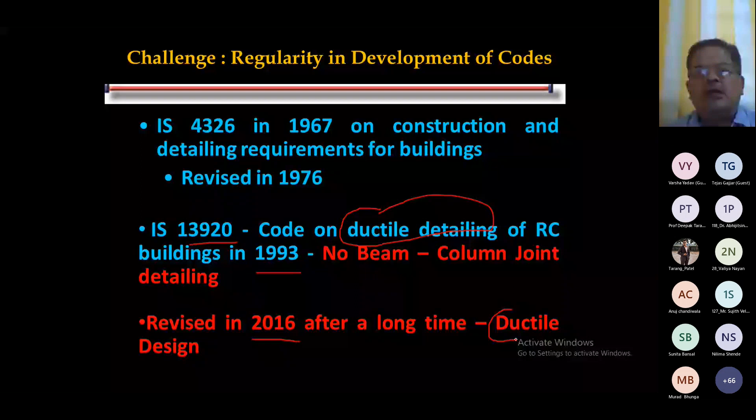We need an improvement in the research, that is again a challenge. I'll give you a simple example: Latur was hit by a major earthquake in 1993, and at that moment Latur was in zone 1. After the earthquake, Latur was immediately placed in zone 4. This should not happen. This seismic zonation of India should be based on scientific research.

For example, the ISR, Institute of Seismological Research, is doing microzonation of Gujarat. They have completed microzonation of the Kutch region, and done it in Gandhinagar, Ahmedabad, and many other parts of Gujarat. It is on a scientific basis to have seismic zoning in India. But if you look at other parts of the map, there is no scientific research, meaning at few places it is taken up, but not at most places. So it should be based on good scientific research.

Now look at some headlines in Delhi regarding earthquake safety: government withdraws order for safety certificates. The government had said structural engineers or competent people have to issue safety certificates to buildings, but they withdrew their orders. Why? Because there are no structural engineers, so no safety certificates. We don't have enough good structural engineers who can say structures are safe or not. That was the structural certificate problem. They removed the clause handing it to MCD or government. Who will issue the safety certificates? So these are the problems with human resources.

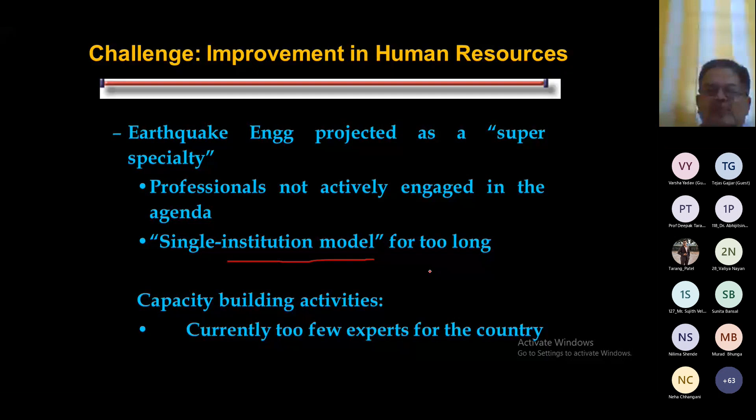Earthquake engineering is always projected as a super specialty. Now, it should not be that professionals are not actively engaged in the agenda, and the single institution model has persisted for too long. For example, IIT Roorkee was dominating for so many years, talking about earthquake safety. But if you want to make the whole of India earthquake safe, the single institution model will not work, and we have to train everyone from the construction industry.

We must have a good enforcement framework for code compliance. We must have certain incentives, and at the same time certain punishments. For example, if you are not wearing a helmet on a two-wheeler, we are punished. If we are not wearing the seat belt in cars, we are punished. So such kind of incentive and punishment should be there for wrong design or correct design.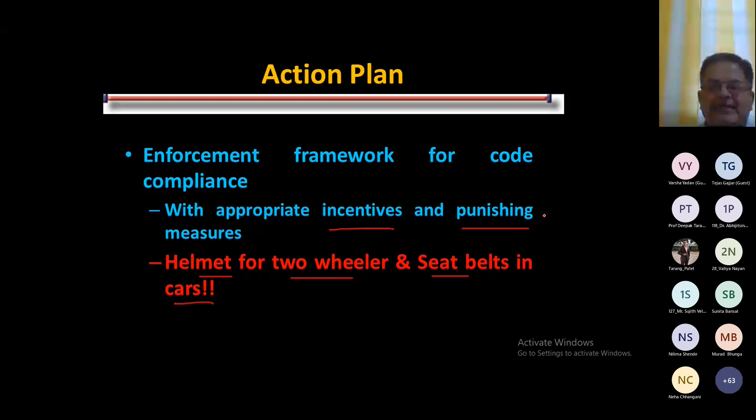There must be legal clarity on code enforcement. This is another important thing: licensing of structural engineers. This is very important.

How do we allow a civil engineer to design the structure? It is not based on knowledge, it is based on his or her experience. If someone is graduating, he must have correct knowledge, and then he should design.

The municipal authorities have to ensure compliance at the time of building permit and occupancy. That is required. So municipal engineers need to ensure the drawings comply, and develop a system for on-site inspections.

Structural engineer professions need to be regulated through the engineers bill. This is very important, and we don't have the engineers board.

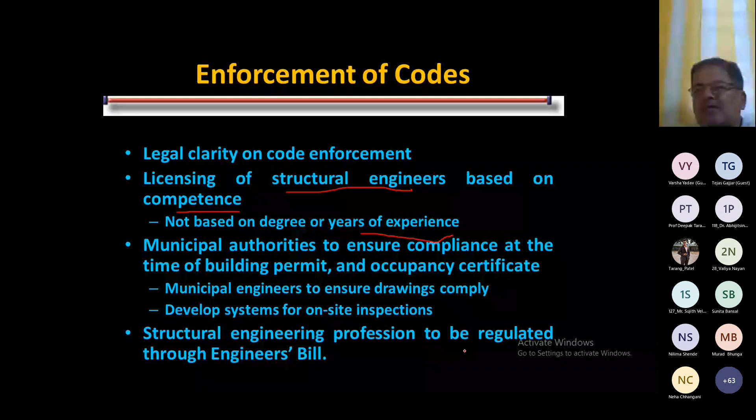On-site, we know that the role of the mason is very important. The masonry work for earthquake resistance is something different, and if the mason is not doing good masonry work, we are inviting trouble. So certification of masons or bar benders is required. We did this for 3-4 years, but after that we stopped again, because we forgot the 2001 earthquake.

I told you competence-based licensing of engineers is required. The Gujarat Council for Professional Civil Engineers act was passed in 2006, and now in 2022 they have implemented it, making it compulsory for all engineers to appear in the exam and clear it for practice. So general civil engineers, if they want to practice, have to pass the exam taken by the Gujarat Council for Professional Civil Engineers. If they want to work as a structural engineer, there is a separate exam they have to appear in. That is required.

What other things are required? Peer review on important projects. Right now, for government projects, they always go for peer review. Structural documentation is necessary, and sample checking of drawings and construction, just like the case of income tax returns.

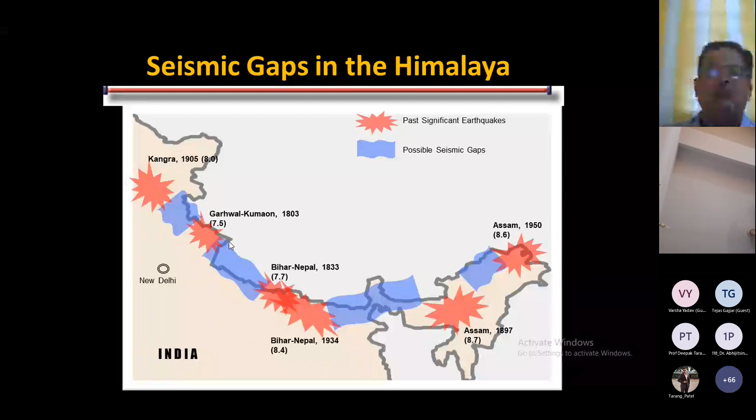So we must have a roadmap. We know, as we have discussed, the theory of seismic gaps and this blue region—these are the potential regions where a big earthquake may come, and we have to be ready for that. We know that earthquakes occur at regular intervals, and a mega earthquake disaster awaits India, particularly in the north or northeast boundary, the Indo-Gangetic plains. So we know this is very important.

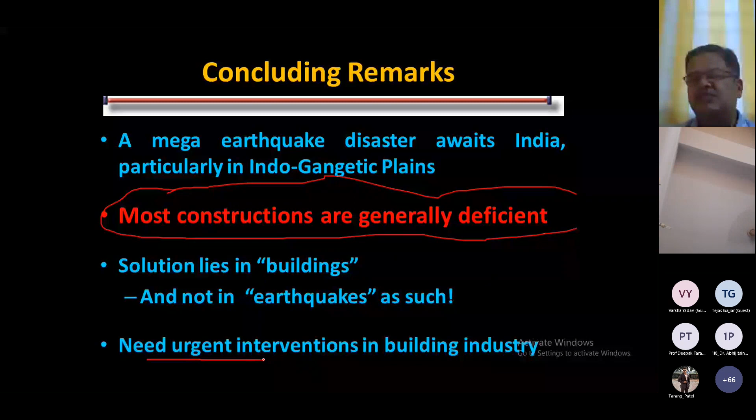Most construction is generally deficient in this particular region. And therefore we have to work a lot, and we know the solution lies in the building, not in the earthquake. So we need an urgent intervention of the building industry.

Certain initiatives were taken in Gujarat after the 2001 earthquake. The curricula of civil engineering introduced the earthquake subject, but it was removed in 2016. Training of engineering teachers took place. Training of practicing engineers and government engineers took place. Awareness regarding the building took place. Mason training and certification was started. Seismic microzonation had been done. Seismic codes were developed by IIT Kanpur and GSDMA.

Two good organizations came up in Gujarat: the Gujarat State Disaster Management Authority and the Institute of Seismological Research. And the most important thing is the Gujarat Council for Professional Civil Engineers was formed, and the Gujarat Professional Civil Engineering Act came in 2006, but it was not implemented up to 2021. It is now implemented in 2022. This council has become very active, and they started taking examinations, and now the certification will be based on knowledge, not on experience.

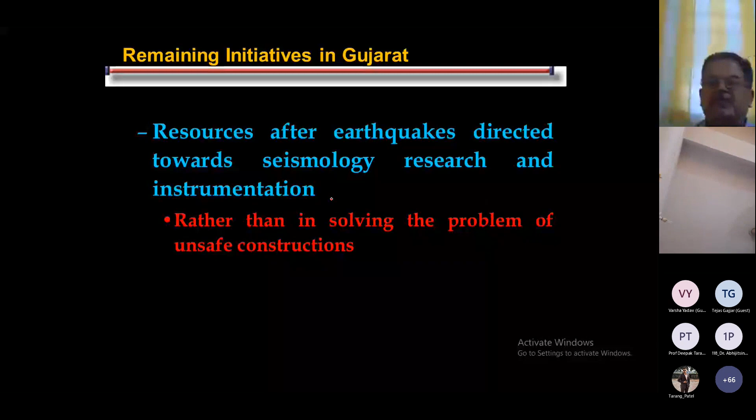So the roadmap to seismic safety is basically community awareness. We have to spread awareness among the people about exactly what they have to see when they purchase houses. Right now, if I am purchasing my house, I am not looking at the structural safety—I am talking about the aesthetics of that building and the cost. These two parts I observe, and that's enough for me. But we have to create awareness.

We have to create a legal framework. We have to create technical competence, professional ambience, enforcement by the local authority, and research and development. So we have to focus on these areas. This is the roadmap to seismic safety.

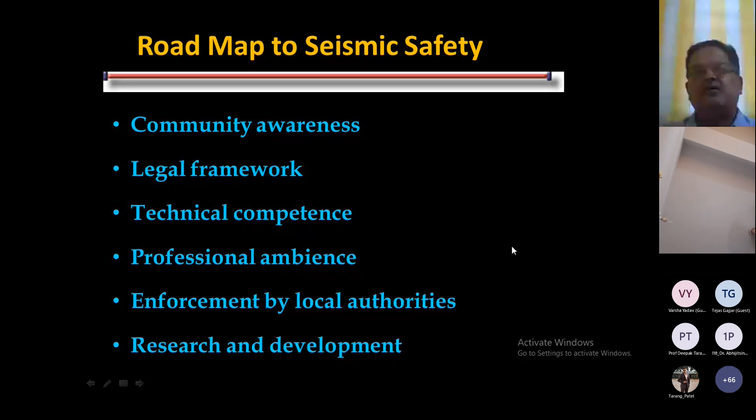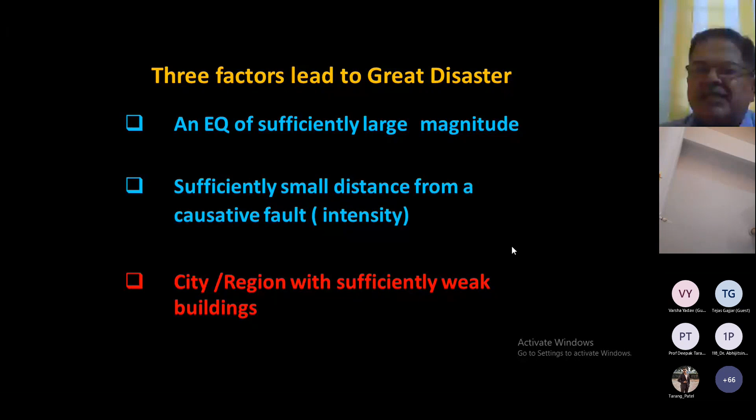There are three factors which lead to great disaster: an earthquake of sufficiently large magnitude, sufficiently small distance from the fault, and a city or region with sufficiently weak buildings. I'm talking about the Great Tangshan earthquake of 1976. Magnitude was 7.8. 243,000 people died out of 10 lakh. What is the reason? The fault was passing through the city.

We have a fault below Chandigarh city, but it is not active. So we are lucky that it is not active. But this fault in Tangshan was active, and 25% of people died—25%, which is remarkable. Buildings were not designed to resist earthquake.

This earthquake was 7.8 magnitude, the Tangshan earthquake. But if you look at the city of Agadir, Morocco, this city was struck by an earthquake of only 5.7 magnitude, and 10,000 people died out of 30,000. One-third of the population gone. What is the reason? The buildings were weak and brittle.

Great disaster doesn't require a large city. Imagine if this happens in Mumbai, what will happen? So what can we do? We cannot predict an earthquake or stop it from happening, but we can prevent collapse of structures by adopting good technology and good practice. This is in our hands.

We cannot predict earthquake or stop the earthquake event from happening, but we can prevent collapse of structures by adopting good technology and good practice. What can we do? We design and construct new structures to perform satisfactorily during earthquakes, and we can address the problems raised by weak old structures. Who can do that? The engineers and authorities are primarily responsible for this.

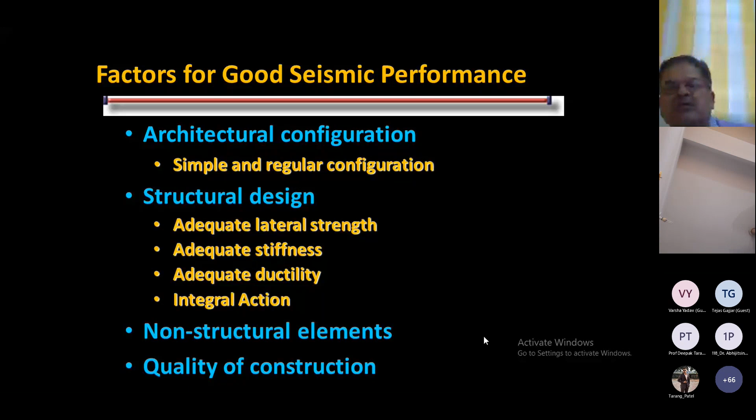Factors for good seismic performance - we have not discussed the technical part right now. Basically configuration, lateral strength, stiffness, ductility, integral action, and quality of construction are required. We'll discuss this in more detail later.

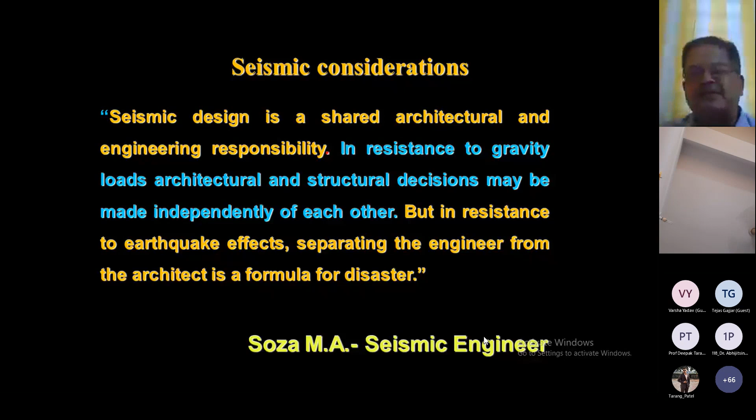We always say that seismic design is a shared architectural and engineering responsibility. If the architect and engineer work separately, in case of an earthquake they are inviting disaster. If they work separately for gravity load, that is fine, but if they work separately for earthquake effects, they are inviting trouble, inviting disaster. Architects and structural engineers need to work together, and good interaction is required between them, which is very important and which is missing right now.

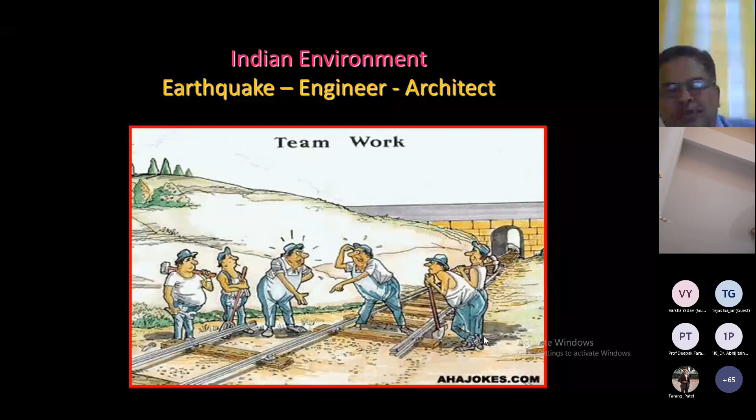I tell you, in India the interaction between the architect, structural engineer, and civil engineer is missing. This is an example of the teamwork. If architects and engineers don't work together for earthquake design, this is going to happen - everything will be messed up at the end.

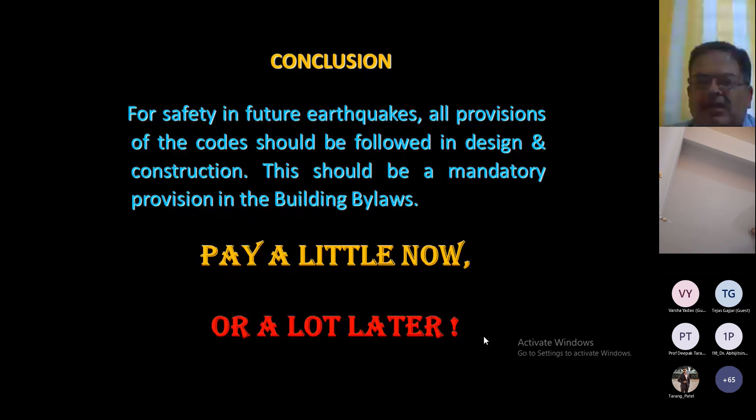We always say: pay a little now. So we have to pay a little attention now, otherwise we are going to pay a lot later.

Your time has already started, and we have to begin with the end in mind, because we know that the journey for earthquake safety is a very long journey, and we have to work hard. We don't know how much time we need. So let us prepare ourselves to reduce earthquake to a nuisance rather than a danger, and convert the earthquake disaster into a routine event. That is required.

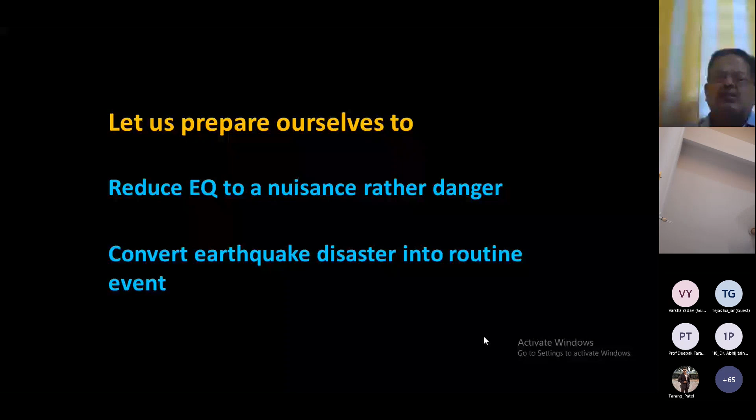If you are reading the reports and everything, it will definitely not give that impact. But if you have seen that casualty, then you are never going to forget it. Still, I remember the dead body of that 4-year-old boy.